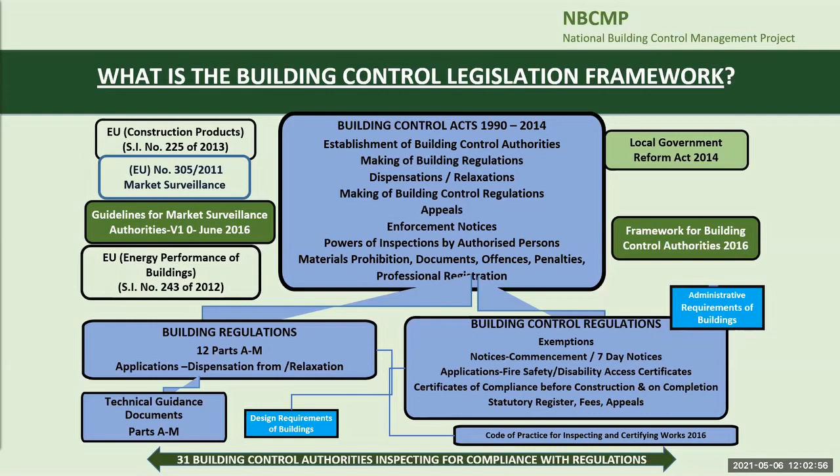To promote compliance with the building regulations, we support building control officers in the 31 local authorities who are continually inspecting for compliance with the building regulations and building control regulations.

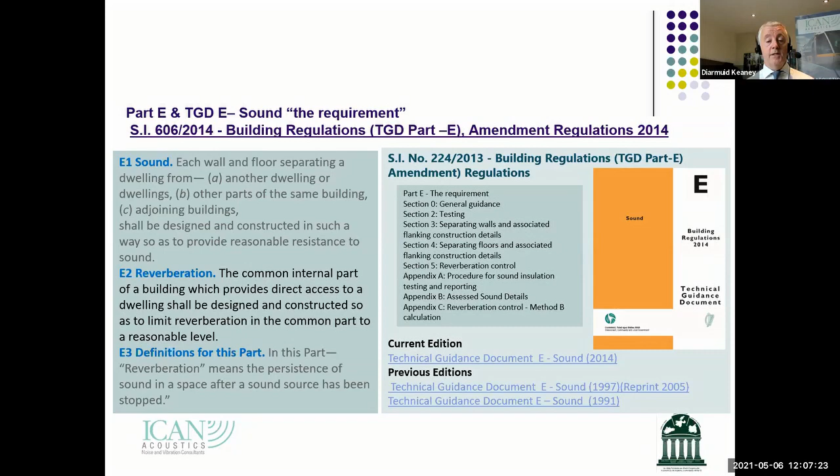There were some previous editions of that, which was 1997, reprinted in 2005. And obviously prior to that, there was a 1991 technical guidance document E.

Again, this is another slide with a lot of information in it. I'm not going to go through it in huge detail, but it just sets out the framework in relation to the building regulations and their application. I included it so that it's in the video as well.

So, technical guidance document E, or the Irish Building Regulations, TGD-E 2014, on-site testing. This is what I'm going to talk to you about today.

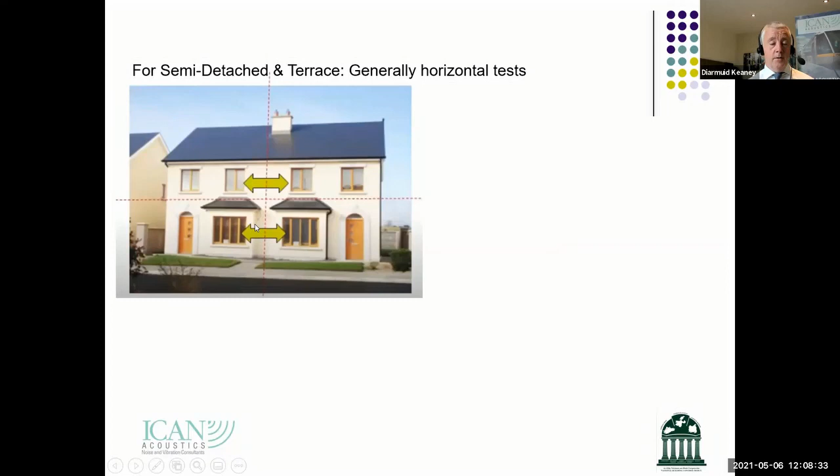Generally in scenarios where we're dealing with semi-detached dwellings or terrace dwellings, we're looking at horizontal tests. If you look at that picture on screen, we have one semi-detached dwelling on the left and one on the right. We're interested in sound transfer across the party wall, or separating elements of that property, both at ground floor level and at first floor level. In theory, if the attic was converted, you'd be looking at potential sound transfer issues in that attic space as well. But for now, let's deal with just the ground floor and first floor.

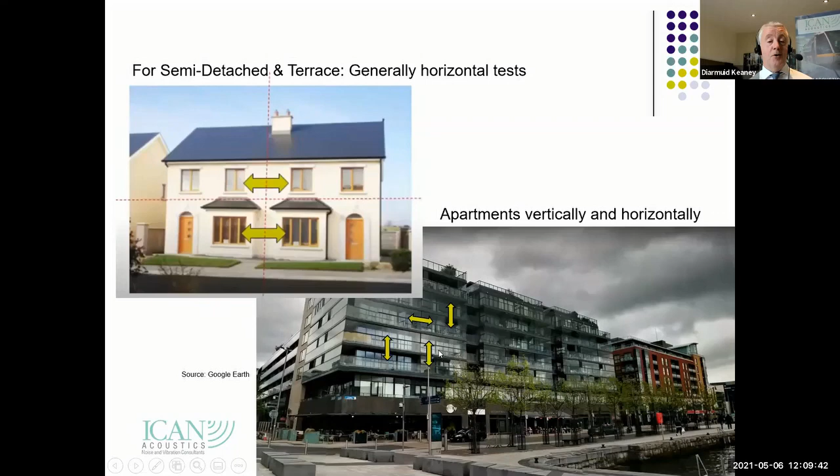We're interested really in evaluating the sound insulation performance between apartments, either horizontally or vertically. You can see straight away from those four arrows that when it comes to apartments, we're interested in sound transfer in more directions than just the horizontal direction, if that makes sense.

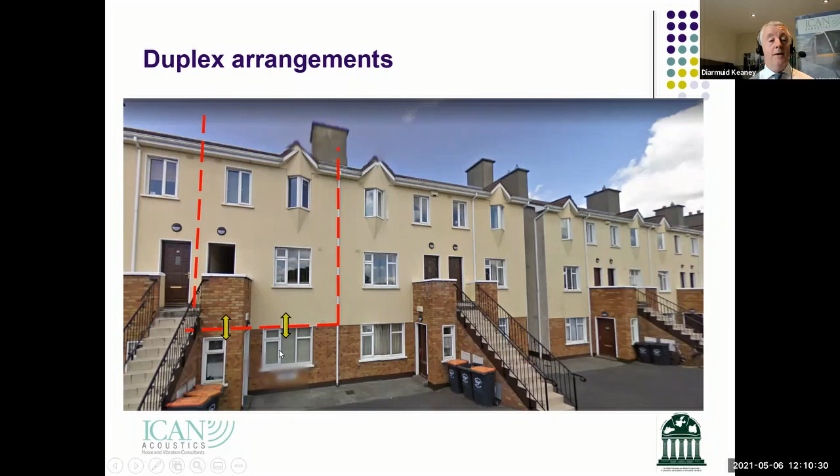I put in arrows just to show you - obviously we'll be concerned about airborne noise and impact noise, which I'll get to in a few slides. But again, we're interested in the separating element between those two dwellings. The same would apply - we're interested horizontally in the separating element between these two dwellings and so on.

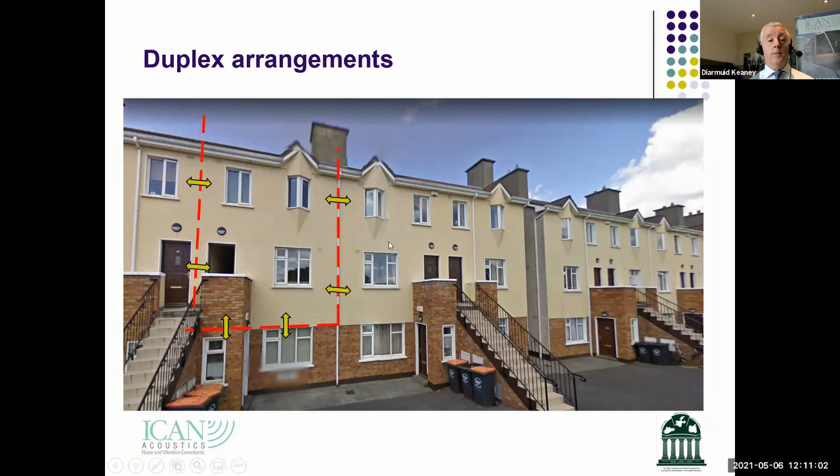So just to understand that in terms of the different types of properties that are tested: you can have semi-detached, terraced, duplex, or apartment arrangements, and there are different testing protocols for all of those different types of buildings. There are two types of tests - airborne tests and impact noise tests.

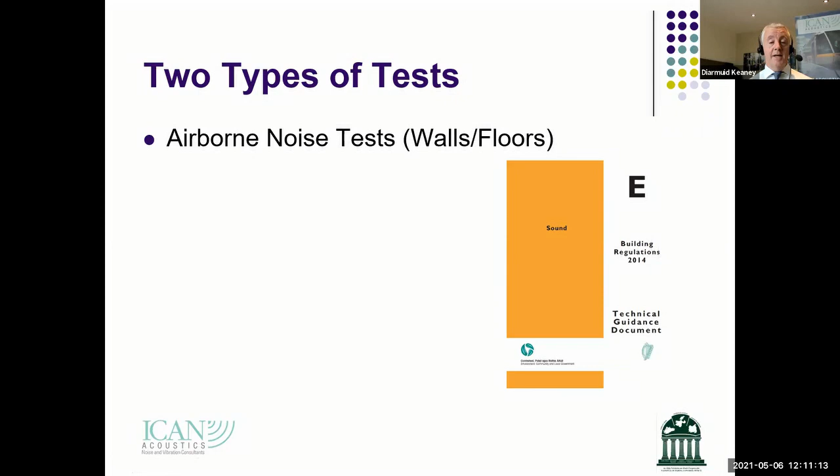Just to explain airborne noise tests - these are carried out on walls and floors. As an example of airborne noise, if you're in a residential property and you can hear voices from an adjacent property, or you can hear the TV or hi-fi or shouting or singing or loud speech, that's an example of airborne noise. Keep in mind the building regulations in the UK originally stemmed from protecting people against loud speech - just to give you a little context about where they emanated from originally.

Now, keep in mind, in terms of the level of transfer between two adjacent dwellings, the concept of having something fully soundproof is quite difficult, and perhaps you wouldn't do it with a semi-detached dwelling or an apartment building even if you required a very high level of sound insulation. So that might help with understanding the context of where they emanated from in the UK. The other type of noise transfer we're looking at is impact noise tests, and these are carried out on floors.

Some examples of those: if you're ever in an apartment building and you hear footfall from the floor upstairs, or footfall in corridor areas, you can have impacts on floors. Somebody dropping a jar in an apartment, for example, on a hard floor surface, induces vibration into the structure and it carries through. Another example is the dragging of chairs—you can hear that in the apartment directly below, and even in adjacent apartments, because they're all structurally connected.

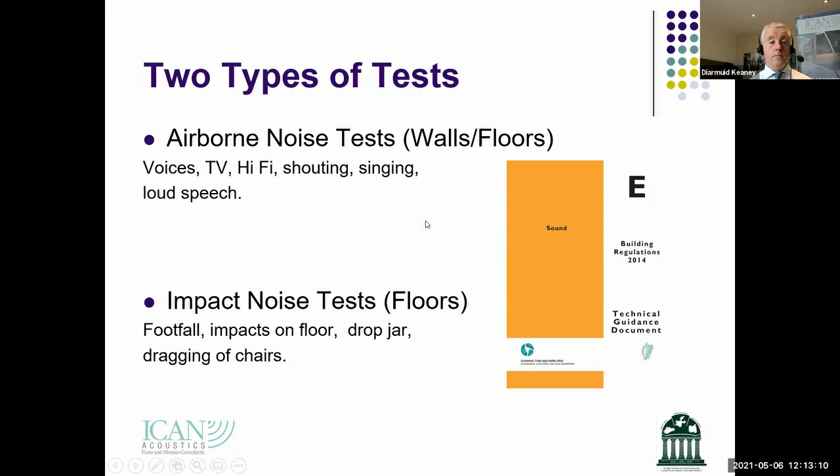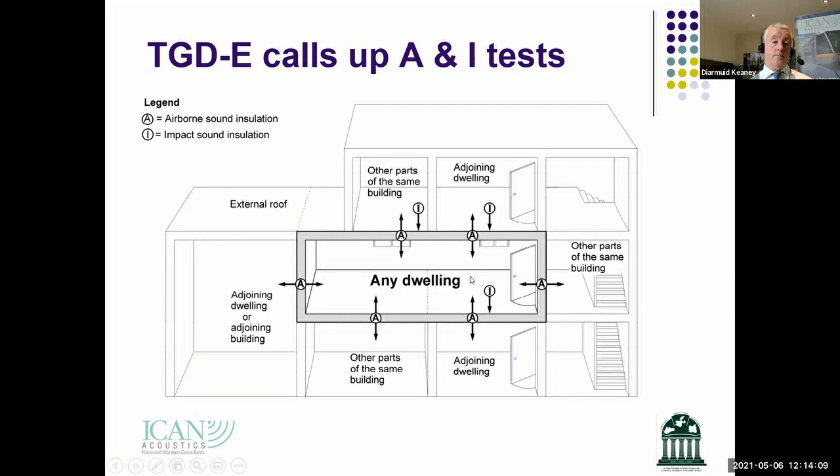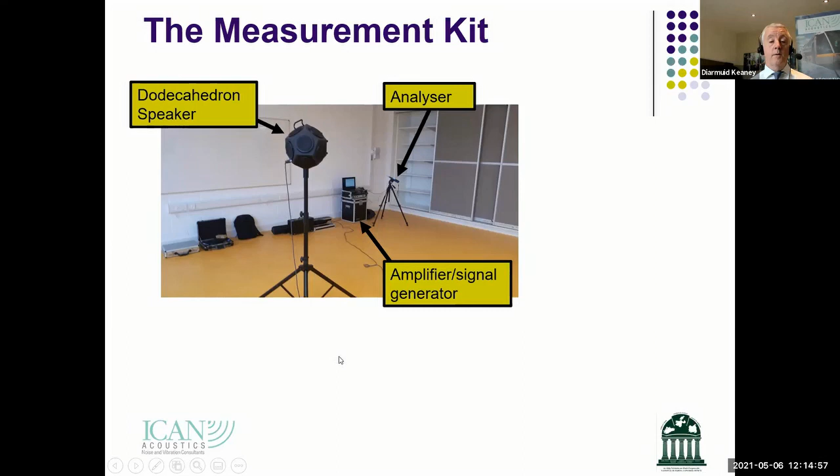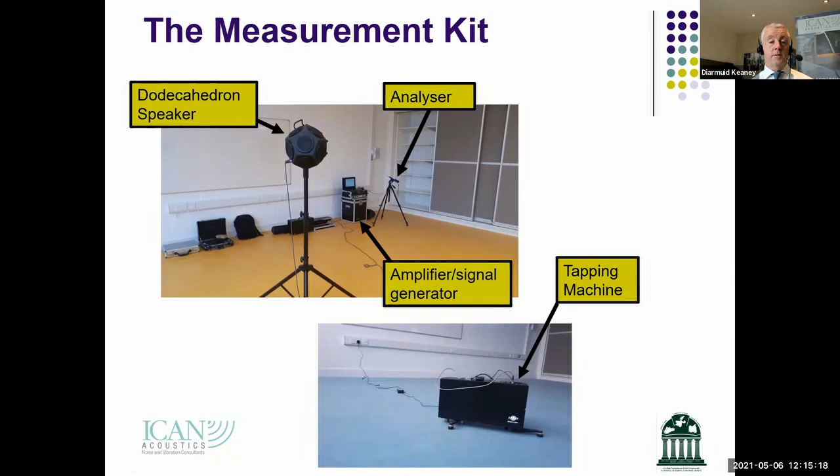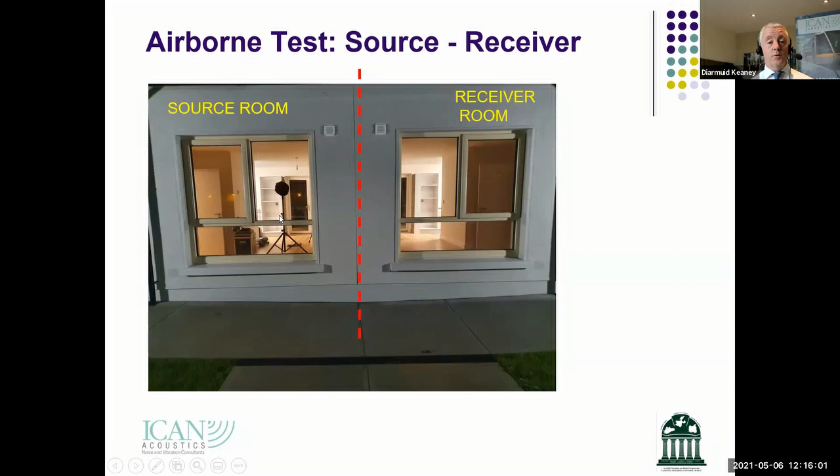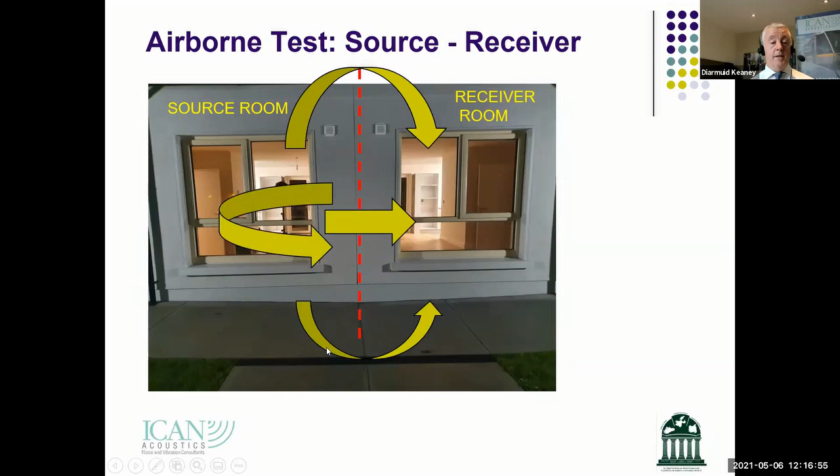In terms of sound insulation and sound transfer between those two rooms, it's important to realize you're dealing with direct paths—sound that travels directly through the wall. Keep in mind, direct paths are only one element of the sound insulation test. The test is a room-to-room test, so it measures both direct and indirect paths. Even when you generate noise in the source room, you'll have noise that breaks through the separating element, but also noise that flanks over, under, and around the separating element. So it's a room-to-room test, and the performance is made up of direct paths and multiple indirect paths—it's the junctions as well as the wall itself.

Technical Guidance Document E 2014 is very good on that, and very strong on it—it defines the wall buildup, and a lot of attention is paid to the junction detail, because the importance of the junctions is recognized. In terms of flanking, they're called flanking paths, describing how sound travels both through the separating element and around it.

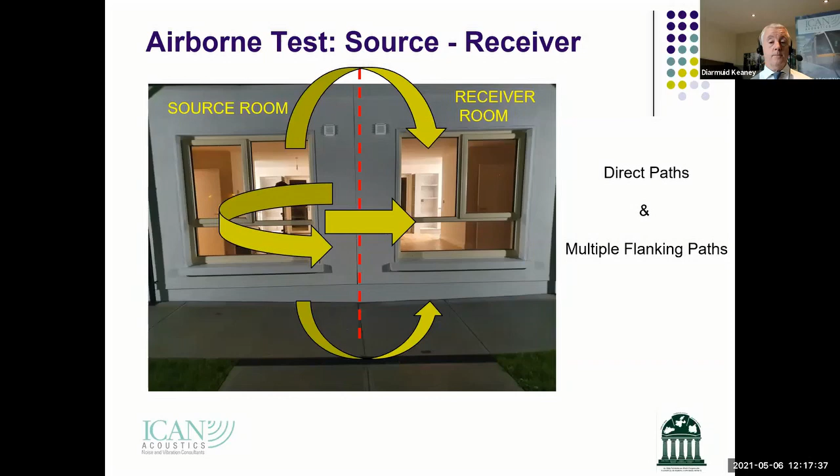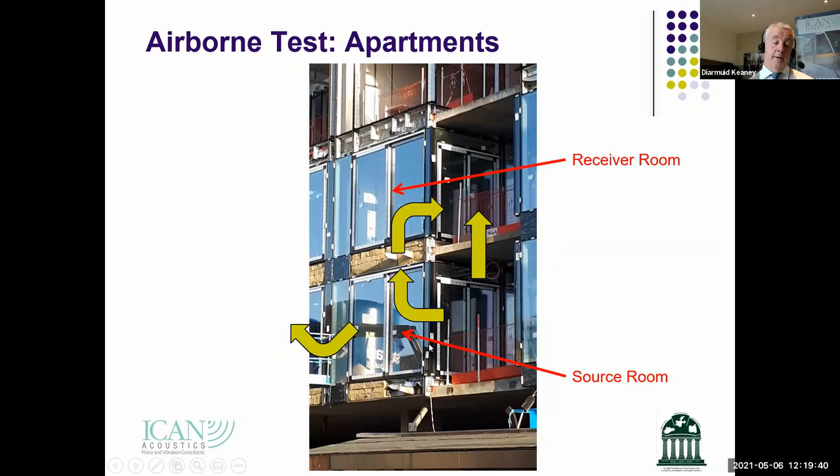Again, this detail is not in Technical Guidance Document E, but I think it's a good one to illustrate flanking paths and the potential weaknesses caused by them. So always think there are direct paths and multiple flanking paths.

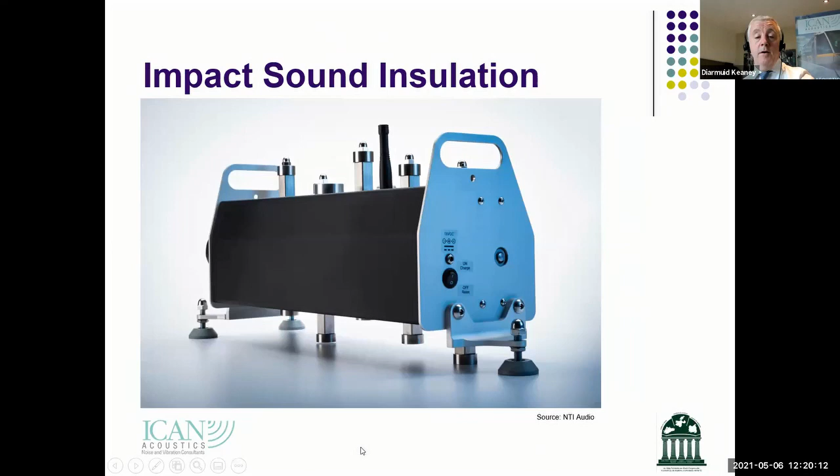In terms of impact sound insulation, this is a close-up example of a tapping machine. You'll notice it's got 3 feet and 5 hammers, and I'll show you in a later slide how they work. If I open this, this is what it looks like inside. Going back one slide, that's it with the cover on. If I take the cover off, you can see there are 5 hammers, half a kilogram each.

They're inside the tapping machine, and what happens is we place it on the floor of an apartment at a certain location, and the hammers fall at a certain height. I'm going to play the video here to show you how that works, so the hammers strike the tiled surface. This is in slow motion, so you can see they strike it repetitively. The idea is that this tapping machine becomes a standardized source we use to carry out impact sound insulation tests. I'll run the video again. It obviously happens a lot faster than what you're seeing, but I've slowed it down to show you what happens.

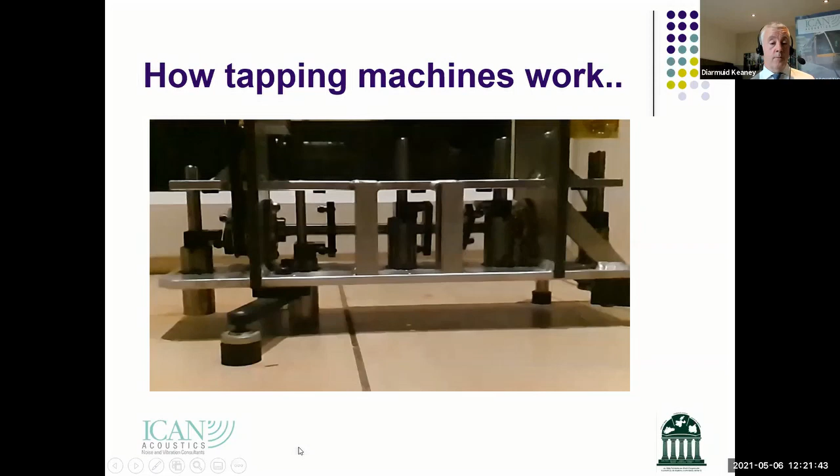Each time one of those hammers strikes the tile, it induces noise or vibration into the structure. Keep in mind that this tapping machine is built in accordance with a specific standard, so anyone carrying out sound insulation tests should be using a tapping machine that meets the type approvals, is calibrated, and so on. The idea is that if another party was to go in and repeat the test, in theory they should get the same results, since the equipment should be identical in terms of its performance and how much noise or vibration it induces into the structure. So just in terms of impact noise tests, let me explain it a bit more.

That's the tapping machine. We place it on a floor, and the 5 hammers strike the floor and induce noise and vibration into it. It sets that floor panel into excitation, essentially. If you can imagine it, it induces vibration which will also carry along the structure. You'll notice that in most masonry buildings there's very good and efficient coupling between walls and floors, so the tapping machine induces vibration into the structure and sets it into excitation.

And what actually happens is those vibrating walls re-radiate that as noise. So again, we're in the receiving room. And I'll come to it later, and this is important in terms of dealing with the metrics, but you can imagine if that tapping machine was off the floor, if I was to temporarily lift it off the floor, that the noise level would be a lot less.

So the only reason I say that is it's important to differentiate between impact noise and airborne noise, and I'll explain that in a little bit more detail. But let's take this example. Suppose I was to put that tapping machine on a soft rubber mat. It would mean that the tapping machine is striking the rubber mat and not inducing as much vibration into the structure, and consequently the noise level will be a lot lower in the receiving room directly below.

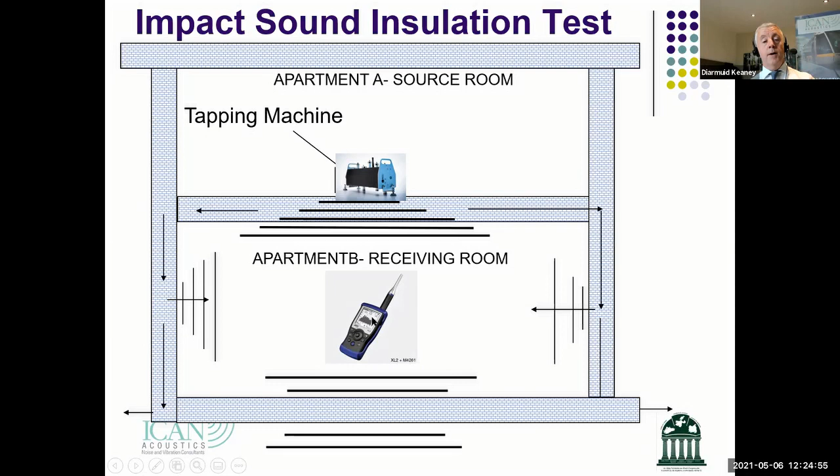Now, in terms of impact noise, it's the other way around. If you recall, we're looking not to exceed a maximum of 58. And if I just go back to the slide earlier, if you think about a maximum of 58 and not exceeding it, a building that has a high resistance to impact noise will result in a lower level in the receiving room. So that's essentially why with airborne noise, you're looking for a value greater than those minimums stipulated, whereas with impact noise, you're looking for the value not to exceed 58.

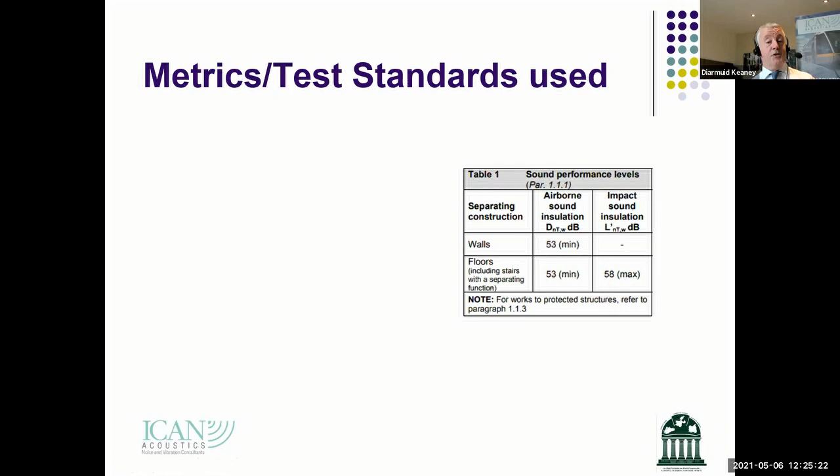So for example, if you measured 59 in your room, obviously the building is very efficient in terms of carrying impact noise into the room below. So again, that's the difference between the maximum and minimum. You're looking for a minimum in terms of airborne noise and a maximum in terms of impact noise.

Now keep in mind, when we're carrying out a sound insulation test, which I would remind you is a room-to-room test, we're carrying them out in accordance with a specific standard. The whole idea behind using a standard like this one here, ISO 16283 Part 1, 2014, is that it deals specifically with carrying out an airborne test. So it means that if somebody who's qualified to carry out a sound insulation test goes in to test a property and somebody else tests it 6 months down the line, in theory, once they're following the standard, they should get repeatable and consistent results. So it's very important that all the tests are carried out in accordance with the standard.

So there is a specific standard in relation to airborne tests, and that's it on screen. In relation to impact noise tests, where we measure the LnT,w metric, again, it's the same standard number, but it's Part 2, and it was released in 2018. Again, there's detail in there about where the tapping machine should be placed, the number of measurements, and so on.

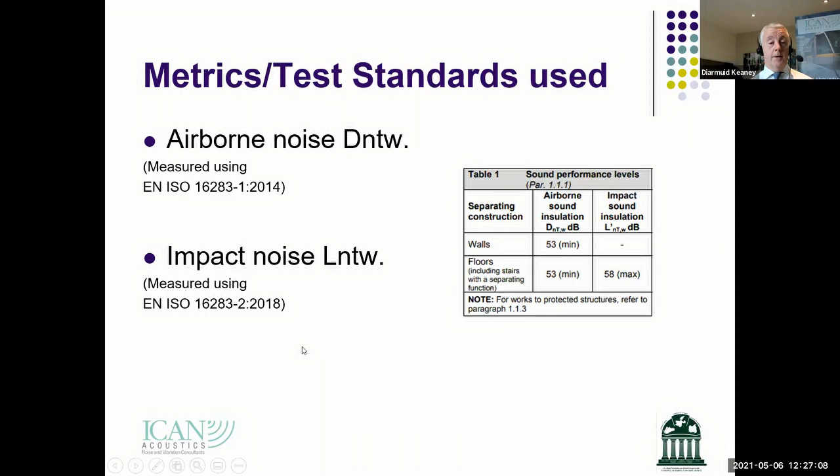So there's very specific details, but the idea behind using a standard is that you can ensure that the results are repeatable and consistent. So in theory, if you're using 2 or 3 different testers, once they're following the standards, they should yield repeatable results, and that's the idea behind it. Okay, so I'll move on to the next slide.

So in terms of the building regulations and how much testing needs to be carried out, well, there is a Table 2 within the building regulations, and you can see there are 2 columns in there.

And really, what it does show is that, for example, for dwelling houses, including semi-detached dwellings and indeed bungalow dwellings, and again, we're always dealing with buildings that are attached and not obviously separate and independent buildings, just to make that clear. But it does set out a minimum of sets, a set of tests.

Now, just to explain what a set of tests is: a set of tests in the context of a semi-detached dwelling typically includes a ground floor room-to-room test and a first floor room-to-room test, and that would be essentially a set of tests. In relation to apartments and duplex dwellings, you can see that there's a lot more testing involved. There's six shown there in terms of the types of dwellings, and the next slide probably explains it

a little bit better. In relation to a set of tests, what it says is, for a semi-detached or terraced home, it would consist of a test across a ground floor and a first floor room. So a set of tests are 2 tests within that property. You'll see then for apartments, as shown in the earlier slides, you saw the apartment arrangement, and I did say to you that it's a lot more complex.

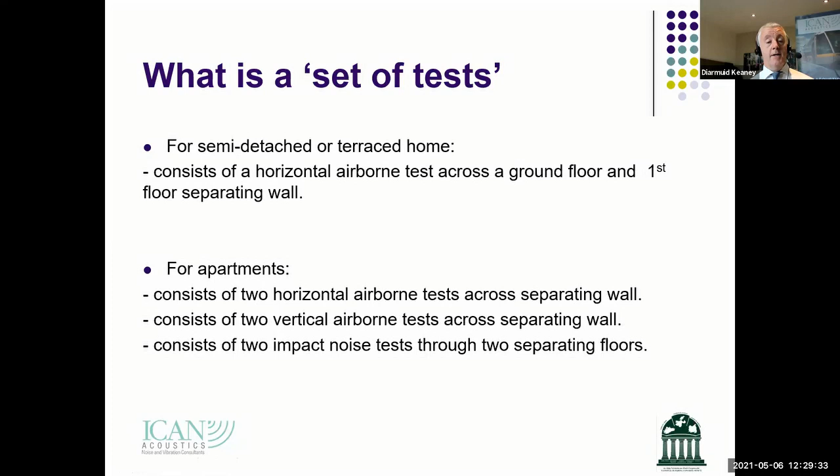Going back to the guidance in Technical Guidance Document E, you can see they're talking about 2 tests in that scenario and 6 tests when it comes to apartments or duplex dwellings. So I'll move on to the next slide.

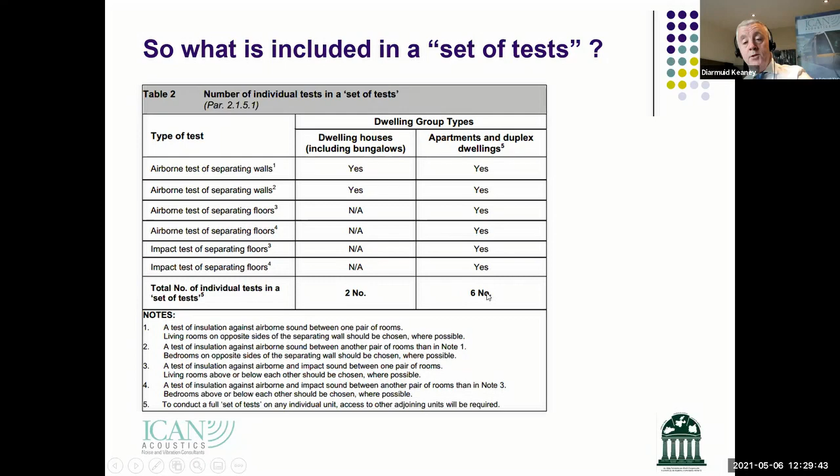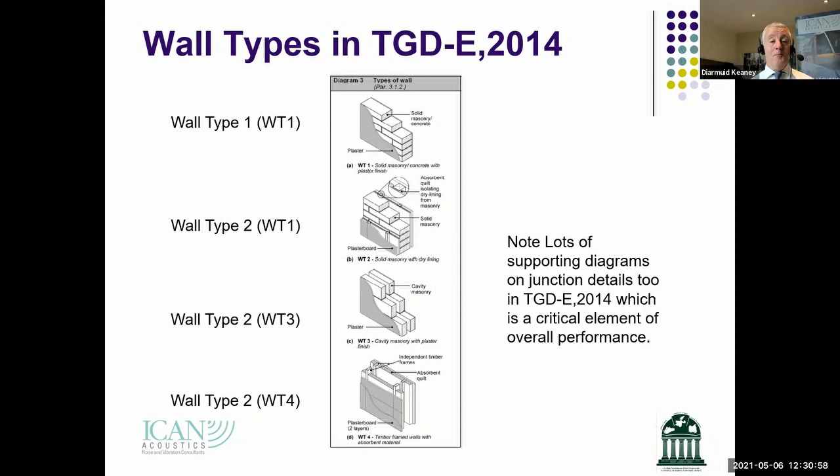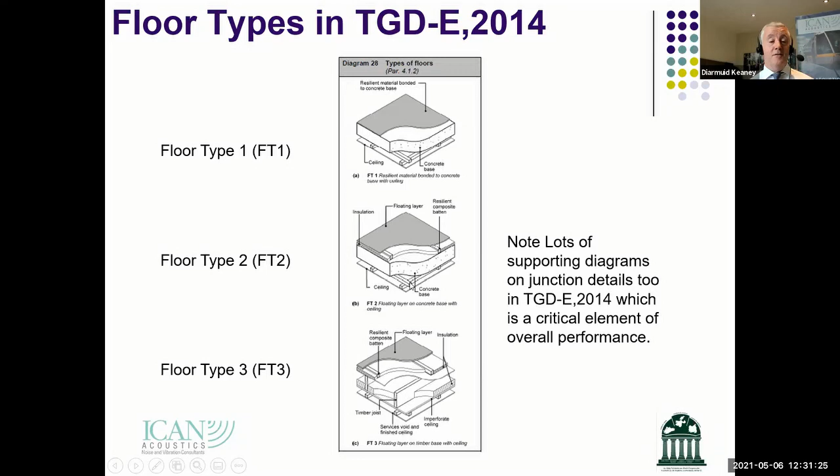So in terms of how much testing, there's a table in Technical Guidance Document E, Table 3A. The idea behind it is that in scenarios where you're following the detail in Technical Guidance Document E, i.e. you're following a wall type or a floor type in Technical Guidance Document E, there are a set of tests required. Table 3A sets out how many tests are required.

So suppose you're building a terrace of 4 houses, for example. Table 3A suggests in that scenario that you carry out at least one set of tests. With that set of tests, you're typically looking at a ground floor and a first floor test. In a scenario where it's a bungalow terrace, you're looking at 2 tests across the party wall in 2 rooms, perhaps the front and the back of the house.

But the important thing is that Table 3A sets out, depending on the number of dwellings you're planning to construct and the types of dwellings, which we won't have time to go into in detail here, essentially a minimum number of tests that need to be carried out. And Table 3A is specifically related to scenarios where you're following the guidance in Technical Guidance Document E, the build-ups, the wall types and the floor types in there.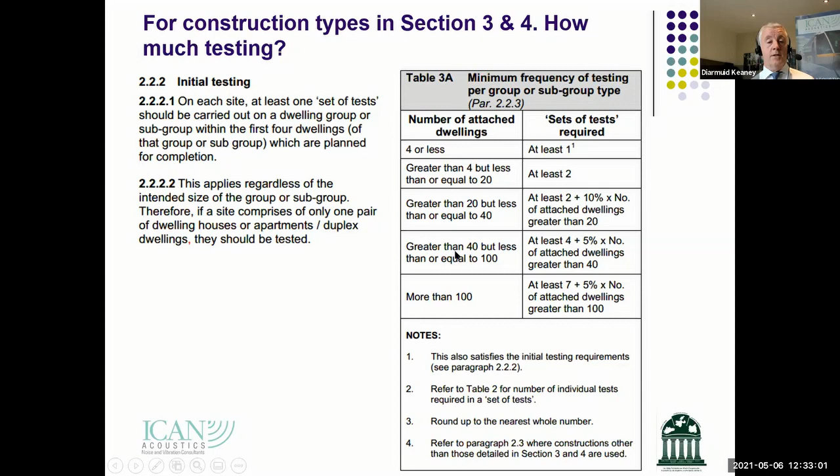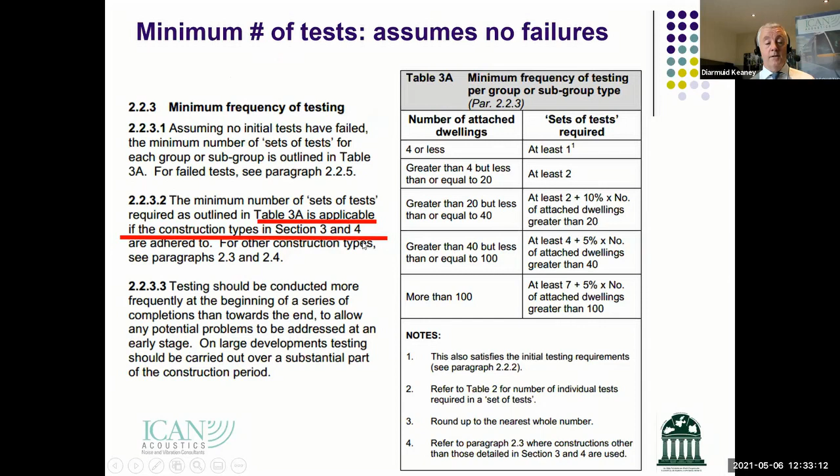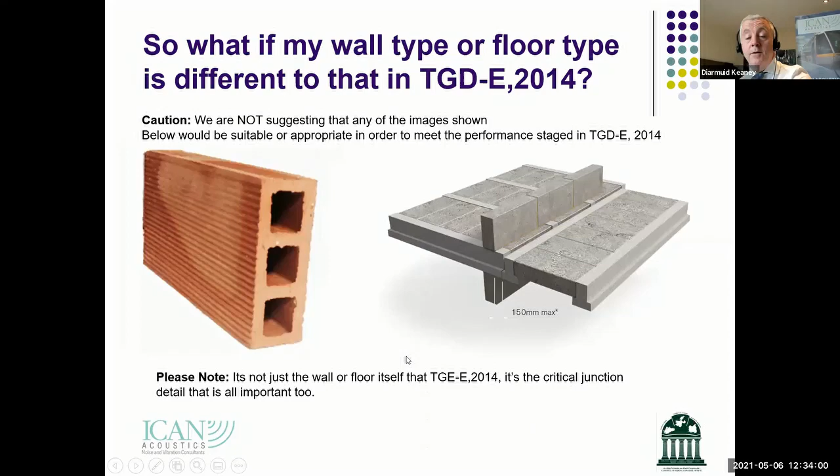Now, keep in mind, these are not details that anyone should use in terms of building residential dwellings, for example, either for a party wall or indeed a party floor, but I just said I'd throw them in there anyway. But Technical Guidance Document E would describe something like those as another construction. These are deemed to be other constructions or other construction types. So there's a table in Technical Guidance Document E, Table 3B. It's titled Other Constructions. Now you'll notice with this table, there is a lot more testing required.

So when somebody deviates from the guidance or from the wall types or floor types in Technical Guidance Document E, you need to do a lot more testing to prove that what you're using will be sufficient to meet the performance requirements in Technical Guidance Document E. So just say the first 8 dwellings or part thereof, essentially at least one set of tests for each separating element. So again, within this, they're looking for a lot more testing. Basically, you haven't used a detail that's in Technical Guidance Document E. So it does actually allow you to use different floor types, but it just means that you need to do an awful lot more testing to prove that it meets the minimum performance requirements.

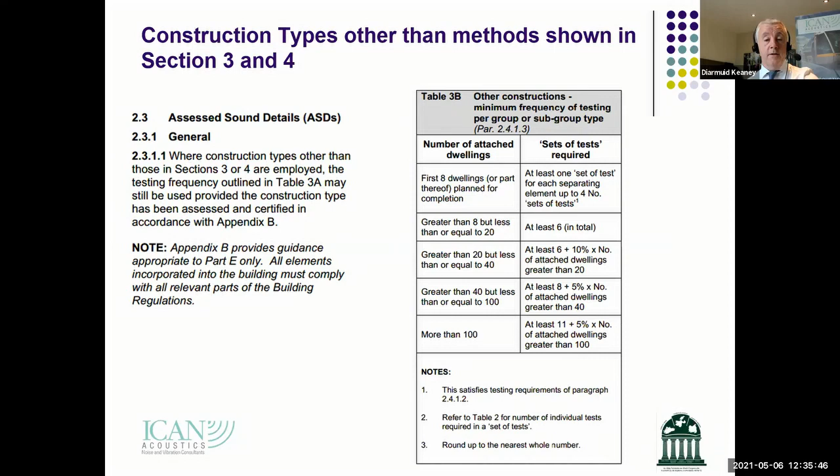Now, keep in mind the amount of tests required are based on the assumption that you don't have any failures either. Obviously, if you have a failure, there's a whole protocol around that and the number of tests that are required after that and repeated and so on. So there's a whole series of actions if a wall doesn't meet the performance value, in terms of it may be upgraded, you may retest and so on. But again, we won't have time to run through all of that in this presentation. There's quite a bit in that as well. But just to highlight that Table 3A and Table 3B are based on the assumption that there are no failures as such.

Okay, so within Technical Guidance Document E, then, this is the section on reverberation control. Now, just to explain, reverberation is like echo. And if any of you have been in some of the older apartment buildings and stairwells that often have very hard surfaces, they might have durable tiles and hard plastered walls, and there can be a lot of echo in these spaces. So in a stairwell that's highly reverberant or highly echoey, you get sound buildup in those spaces. Somebody at the top of the stairwell, you can hear them perfectly well at the bottom of the stairwell. So sound carries very efficiently in these spaces.

So it's generally deemed to be an undesirable effect for lots of reasons, but in terms of the building regulations, one of the concerns is around the propagation of noise over corridors. So, for example, if you think of a hallway outside, say, 10 apartments, the last thing you want is a buildup of noise in those areas. So for people using those spaces, there's a certain amount of absorption, and the spaces are deadened in some regards, so that noise doesn't propagate as far along those areas.

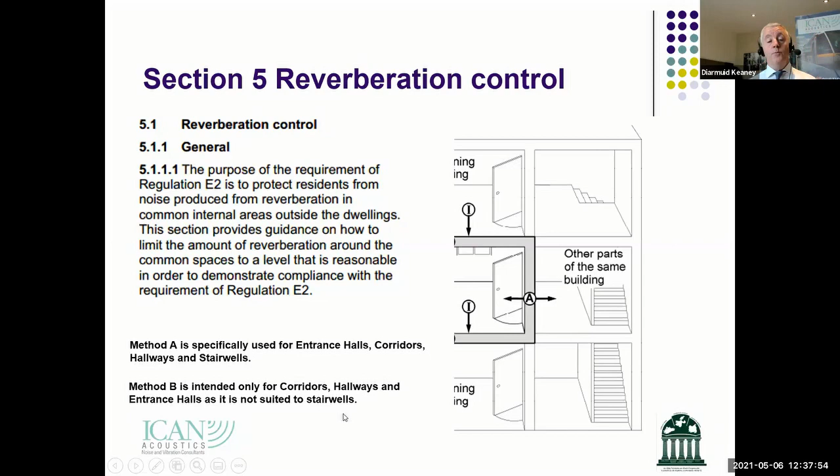There's a simplified method, which is called method A, which essentially says that absorbent material should cover an area equal to or greater than the floor area with a Class C absorber. Now, just to explain

classifications in terms of absorbers, a Class A absorber would be a very high performing absorber. So when you're going out to buy, for example, a ceiling tile, they have different classifications. So Class A would be the highest absorption standard. Class B would be a bit lower. Class C would be lower again. Class D and Class E. So they are all classes.

But what the building regulations call up or suggest is essentially that you need to install an equivalent area of a Class C absorber equal to or greater than the floor area of the space, for example, be it a corridor or indeed a hallway and so on.

Then there's method B. In lots of cases, it may not always be possible to install, for example, ceiling tiles; the aesthetics of ceiling tiles in a high-end apartment block may not look particularly well, and in some cases you have alternative methods. You can obviously predict the likely reverberation time. You can specify treatments and so on. So method B allows for that.

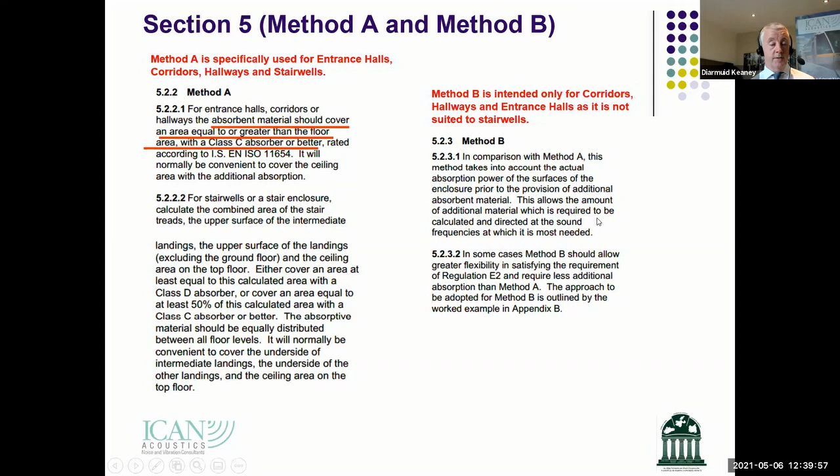So in terms of a noise consultant being involved, one of the things you might be asked to do is to do a prediction in relation to that and determine, well, what if we don't do this? What if we do this? So we'd often work with developers in terms of looking at the surface finishes or the treatments that are planned for the common areas, and look at ways of reducing the reverberation time in terms of satisfying Technical Guidance Document E.

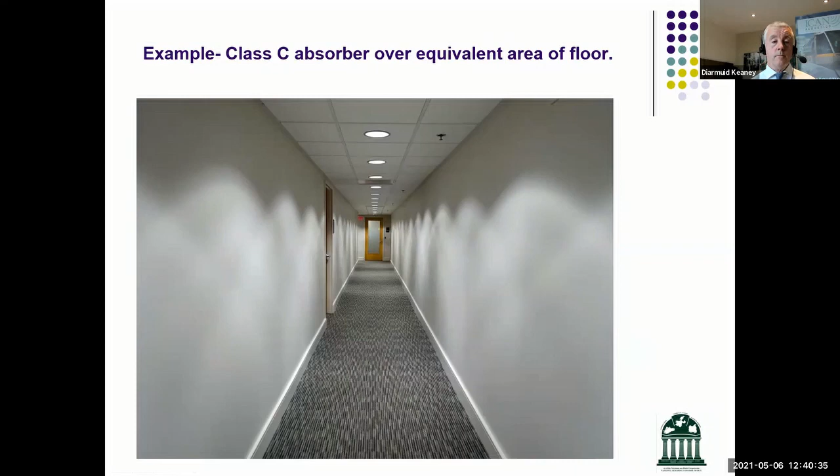Again, I explained to you that these spaces like stair cores and all of those areas can be highly reverberant. In a high-end apartment block, they generally would require absorption to be installed. And again, in terms of floor area, that might be difficult in some cases, but it's a factor that needs to be considered, and it's part of Technical Guidance Document E.

So nearly the last slide, then, you'll be happy to know I'm near the end.

In terms of competence, it's important to highlight that somebody who's shown how to carry out a sound insulation test doesn't have any competence in terms of giving you building design advice. Being able to carry out a test is something that you can train somebody to do. But in terms of understanding the acoustics or the

theory behind a modification. So for example, let's paint this scenario: you carry out a sound insulation test and the wall fails to meet the performance value. The next thing someone is going to need is advice. What do we do now? How do we improve the situation? So the engagement of a qualified noise consultant means that they are qualified to give you that advice. That's an important distinction between somebody who simply carries out sound insulation tests and somebody who can advise you on remedial works.

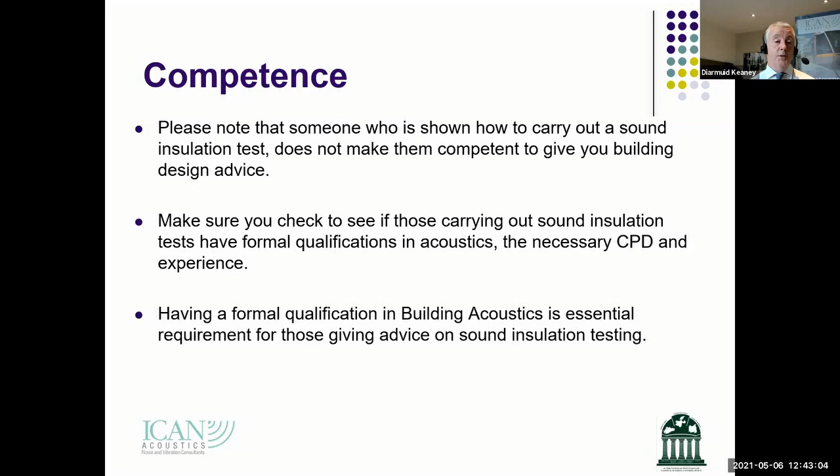Keep in mind, when you hire a qualified noise consultant, they carry professional indemnity cover. They are qualified to give you advice on what remedial works you should take and so on. So that's an important element I just want to convey to you in terms of competence. So I think that's pretty much it.